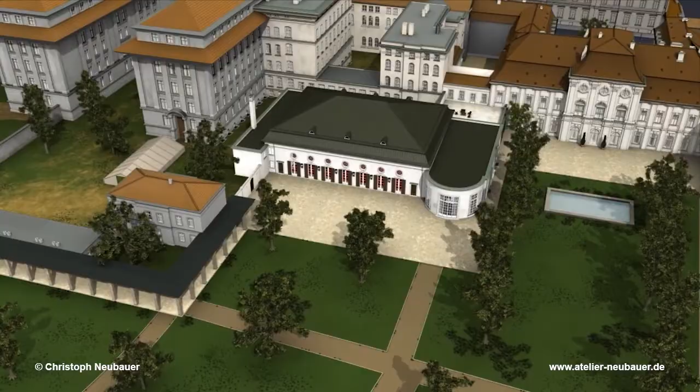In North Africa, the German army was retreating. In Russia, the Sixth Army was surrounded at Stalingrad, and the Luftwaffe had lost air supremacy over Germany. With this air raid, the theater of war had finally reached Berlin. Just one day after the attacks, Joseph Goebbels declared total war in a speech at the Sportpalast. Although Hitler had rarely been in Berlin since the start of the war, he was now worried about his safety within the Reichschancellery.

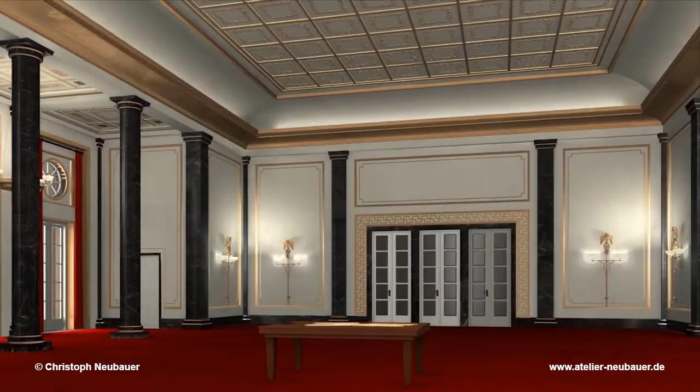On January the 18th, just one day after the air raids and on the day of Goebbels' declaration of total war, Hitler commissioned Albert Speer with the enlargement of the Reichschancellery bunker in Berlin and with the reinforcement of the bunkers of the new Reichschancellery. Speer was, however, not the architect in this case. The extension of the existing bunker had already been planned in 1942, so Albert Speer, as head of the Todt organization in charge of all major building projects, was only required in January 1943 to present the plans that had previously been drawn up by his head of office, Piepenburg.

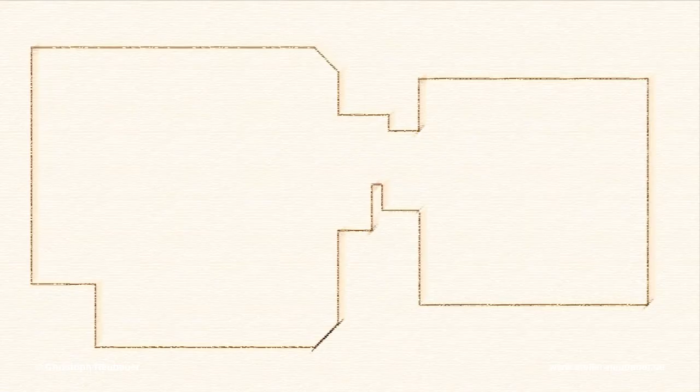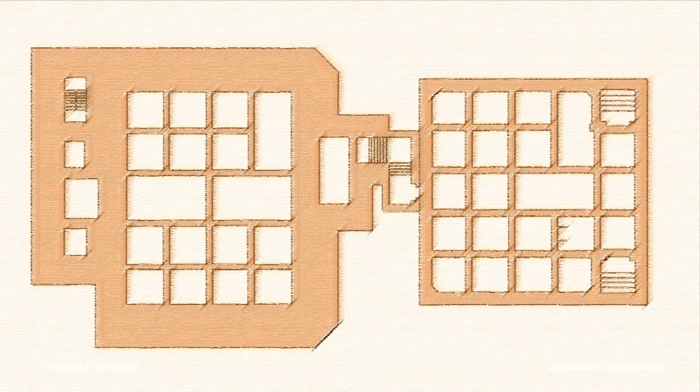The extension of the Reichschancellery bunker involved two separate building works. The first was the reinforcement of the existing bunker. The second was the construction of a new, deeper bunker, the so-called Tiefbunker. It was to be linked by a staircase to the existing Reichschancellery bunker. During a bombing attack, Hitler would have had to pass through the old Reichschancellery bunker on his way from his apartment into the new Tiefbunker. He therefore ordered the old bunker to be reinforced.

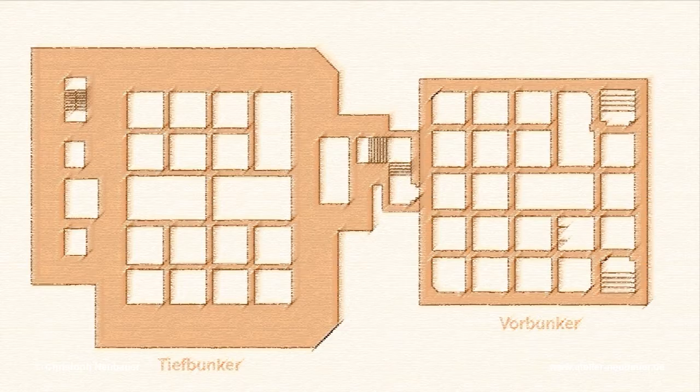Through the enlargement of the shelter, the old bunker of the Reichschancellery would become the Tiefbunker's vestibule and would therefore be called the Vorbunker. While the Vorbunker would continue to be used by the occupants of the old Reichschancellery, the Tiefbunker would be reserved for Adolf Hitler alone. He ordered the Tiefbunker to be laid out on a similar scale as the Vorbunker. But the floor of the new bunker should be 7 meters below the Earth's surface, that is 2 meters deeper than the base of the Vorbunker. This enabled the ceiling of the Tiefbunker to be as much as 4 meters thick.

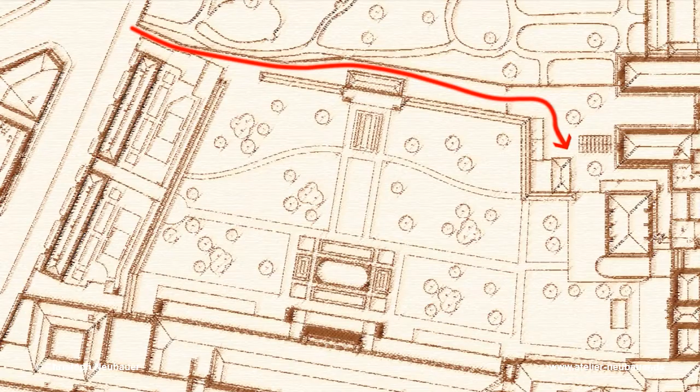The Tiefbunker would be built in the garden of the Reichschancellery, directly in front of the reception hall. A road leading from Hermann Göring Street through the garden of the Foreign Office would be used as a secondary access road to the construction site. For this, a breach in the new pergola near the reception hall was planned. One further access into the garden of the Reichschancellery already existed. The northwestern corner of the pergola had not been closed since the official opening of the new Reichschancellery.

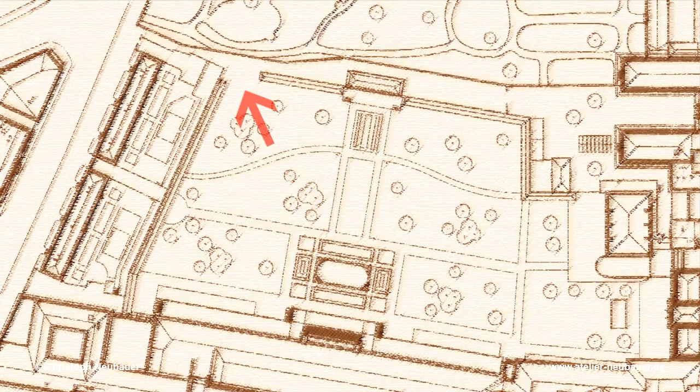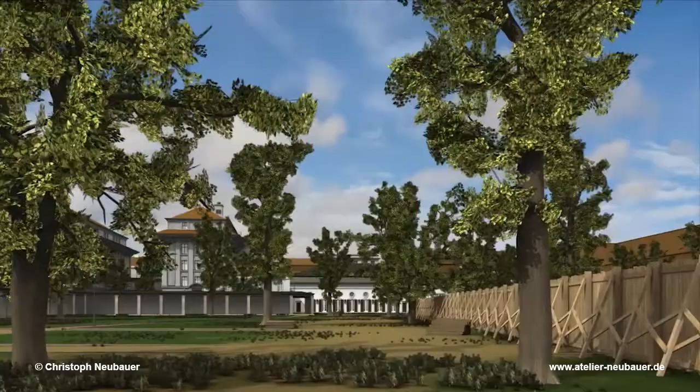During 1943, Hitler either stayed at his headquarters in eastern Prussia, which was known as the Wolf's Lair, or at the Berghof in Bavaria. As he only spent a few days in Berlin, it was not necessary to take him into consideration during the construction works. The once so well-maintained garden of the Reichschancellery was transformed into a huge building site. So as to protect at least Hitler's study from the attention of curious construction workers, a wooden screen was erected along the entire length of the Reichschancellery garden. The screen ran diagonally across the garden, parallel to the side access road, which had been made for the use of construction vehicles.

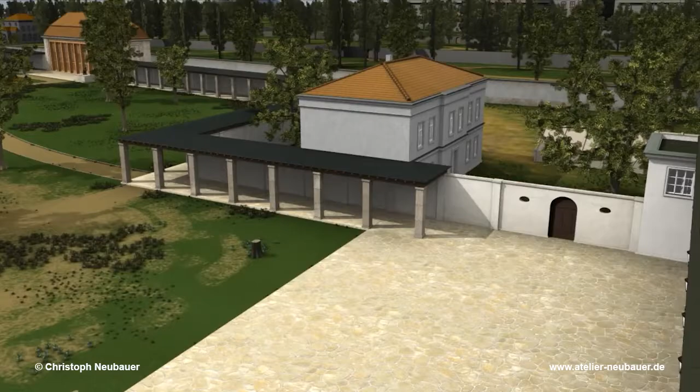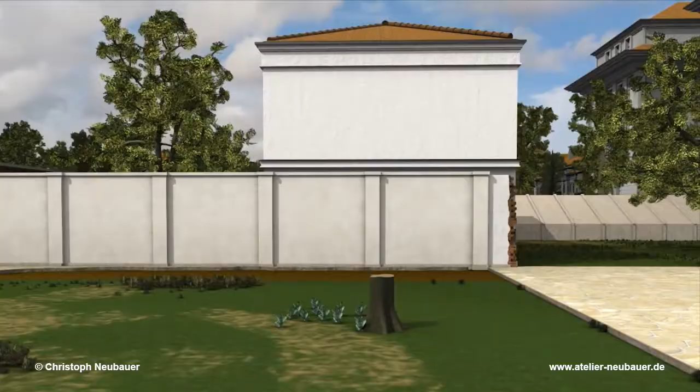In the summer of 1943, workers from the Hochtief Company began preparations for the construction of the Tiefbunker. To gain a secondary access to the building site and allow enough space for the machinery, the roof and some of the columns were removed from the east side of the pergola, and an opening was made in its back wall. Before the construction work could start, the stone paving slabs also had to be removed from the terrace.

Since the water table in Berlin lay at a depth of 3 meters and the base of the construction pit was to be at 10 meters, it was necessary to lower water levels in the region of the building site. Several well shafts were drilled close to the building site, from which water could be pumped via a system of pipes into the city's drains. From now on, the pumps worked day and night to keep the building site and later the bunker itself dry. To remove groundwater from the area of the bunker, a special pipe was laid at an angle through the garden of the Reichschancellery, ending in the drain at Hermann Göring Street.

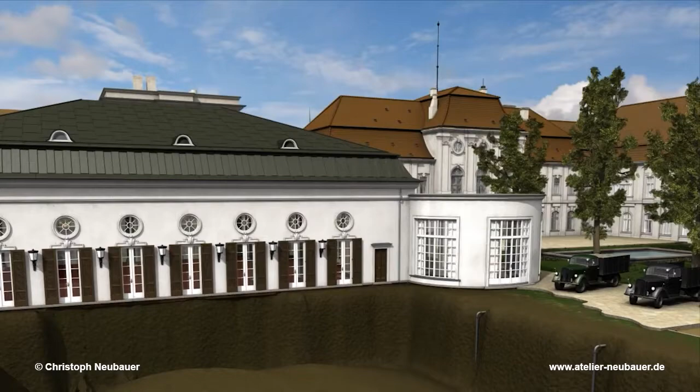After these initial preparational measures had been completed, the first 4 meters of the excavation pit could be dug out. In the next phase of work, a curtain of steel pilings was rammed deep into the ground. This ensured that the later 10-meter-high side walls of the excavation pit would not collapse in the course of building operations.

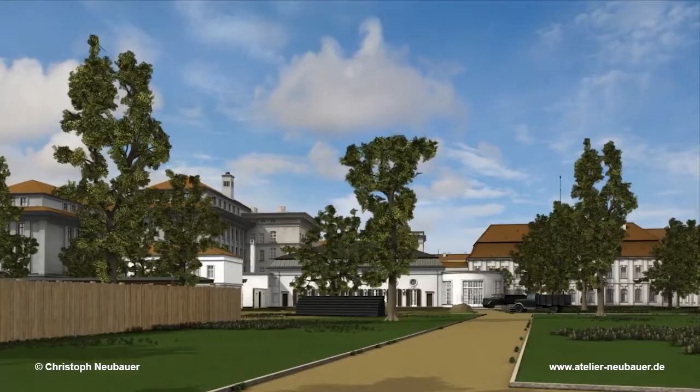As with the Vorbunker before, the Tiefbunker was built in an open excavation pit. This method of bunker construction was unusual during the war, as Allied planes entered German airspace on a daily basis. They would have been able to observe the building activities and to take photographs. There must have been great confidence in the strength of the bunker, as the site would have been known to the enemy even before construction began. Concentrated attacks on the bunker were to be expected.

Once the steel pilings were rammed into the ground, the pit could be excavated to its final depth. The pit was an estimated 10 meters deep and 40 by 40 meters wide. The pit provided enough space for the Tiefbunker itself, the guard rooms, an airlock, and an integrated stairwell.

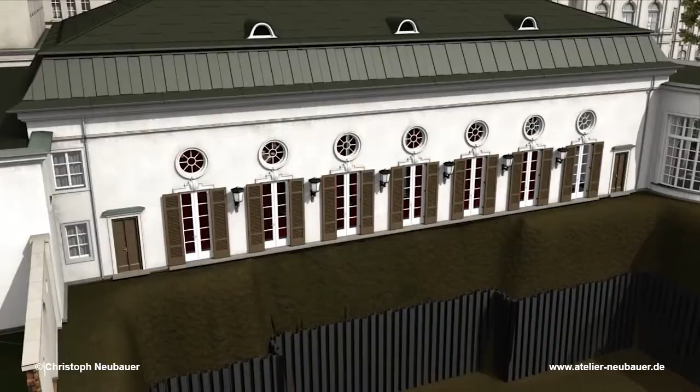The Tiefbunker was erected at least 3 meters away from the reception hall to prevent it from sliding into the construction pit and to ensure its stability. In this way, the Vorbunker could remain fully operational at all times during the construction of the Tiefbunker.

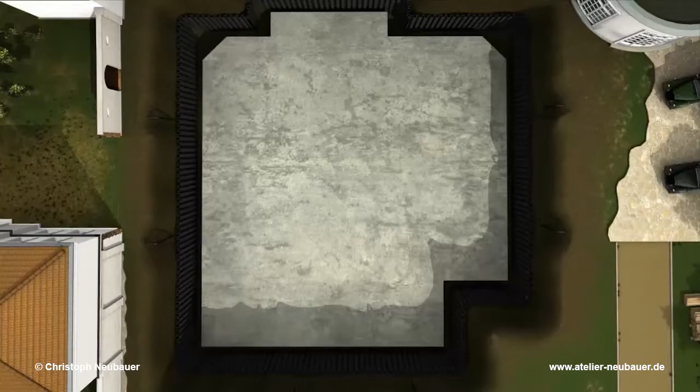The Tiefbunker and its entrances dictated the size of the base plate, which was cast at a thickness of approximately 2.5 meters into the base of the excavation pit. This provided the foundation on which the entire superstructure was to be erected. The foundation of the bunker measured 28 meters in the north-south direction and approximately 30 meters in the east-west direction.

The external walls of the Tiefbunker were made of 3.5 to 4 meters thick reinforced concrete, according to Hitler's exact specifications. To make the walls, a mesh of steel bars was first erected and then shuttered using wooden boards in the conventional way. Concrete would then be poured into the resulting form at a later stage.

Special openings for doors or supply shafts had to be worked into this wooden construction before the form could be filled with concrete. There are indications that such a shaft was integrated into the wall at the eastern side of the machine room. It probably allowed ventilation pipes from the air raid ventilation system to pass through into the bunker.

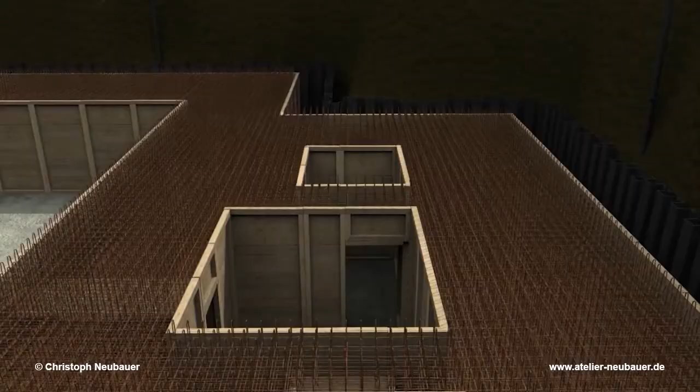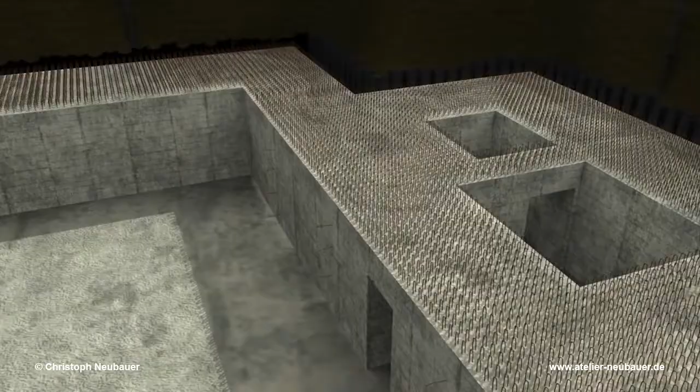When the wooden shuttering was complete, the pouring of the outer walls could begin. The liquid concrete was poured into the steel network covered by the wooden panels. This combination of steel and concrete gave the resulting reinforced concrete its special strength. The internal space of the Tiefbunker measured 20 meters from north to south and 15.6 meters from east to west.

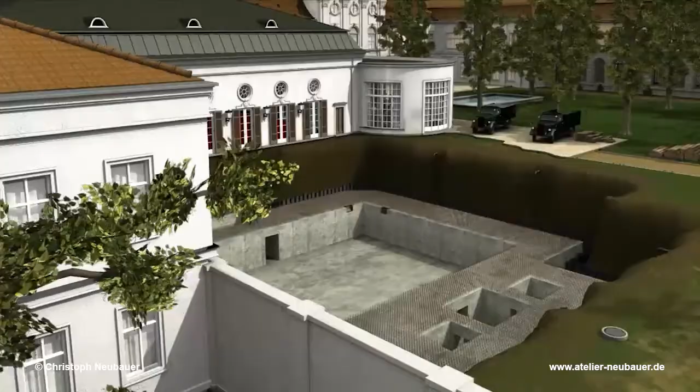It seems that Hitler was satisfied with the layout of the Vorbunker, as he wanted the Tiefbunker to be an almost one-to-one replica of it. The inner walls of the Tiefbunker all collapsed in 1947 during an attempt to demolish the Führerbunker. For this reason, there were no details of the Tiefbunker's internal layout in the survey carried out by the East German Secret Service in 1973.

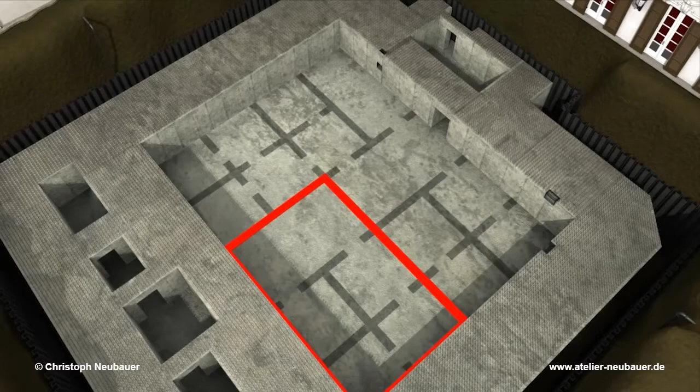The rooms in the bunker used by Hitler himself were, however, photographed between 1945 and 1947, allowing us to make a fair reconstruction of the southwestern area of the Tiefbunker. But exact measurements are only known for Hitler's office, which was 3.37 by 3.17 meters. The size and the functions of the other rooms can be approximated through eyewitness reports.

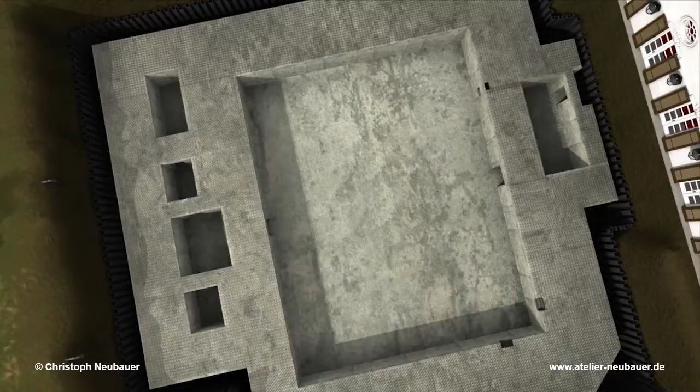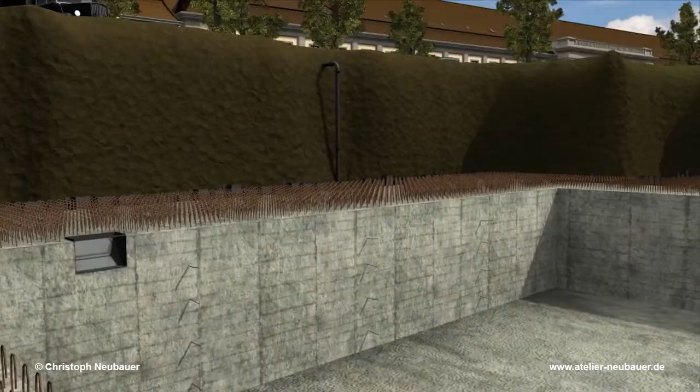The dividing walls, which created the different rooms, were cast with a thickness of 50 centimeters. These walls were cast within the bunker shell once the outer walls were completed. They were only connected to the outer walls by means of 3 or 4 steel bars bent out from the steel matrix of the outer walls before the concrete was poured in.

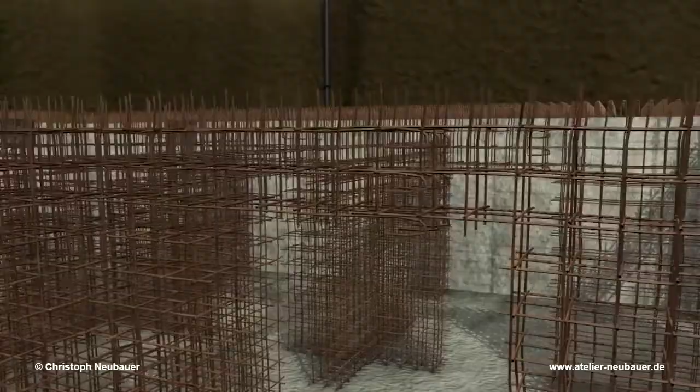The inner walls, therefore, stood as a kind of free-standing grid, more or less independent from the outer walls of the bunker. In this way, it was ensured that, should the outer walls shift under a direct hit, they would not take the inner walls with them. The inner walls were essential to prevent the ceiling of steel girders from collapsing, which will be described later.

Although the interior fittings were installed sometime after the completion of the framework of the Tiefbunker, it makes sense to describe the use of the rooms at this point. As in the Vorbunker, the room in the Tiefbunker for the emergency generator and the air filters for the ventilation system was located at the northwestern corner of the bunker. Opposite this room was the washroom with the toilets. Adjoining the washroom was a room containing electrics and pumps for wastewater extraction and for the internal freshwater well.

The layout of the Tiefbunker was almost an exact copy of the Vorbunker. However, comparing the arrangement of the doors between the two bunkers, it becomes clear that the Tiefbunker was not just a simple copy, but had been especially designed for Hitler's use.

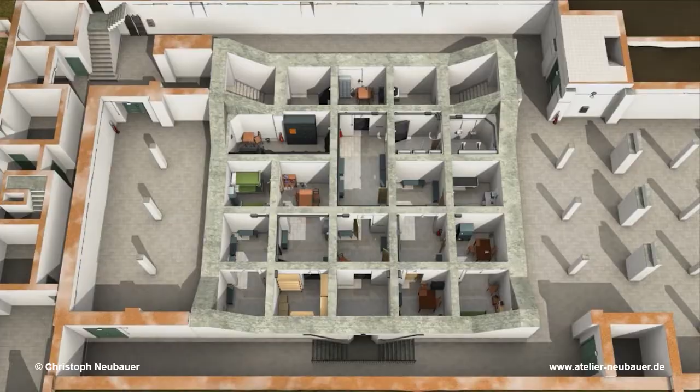The Vorbunker was designed to shelter up to 250 people. The doorways were arranged to allow people looking for shelter to disperse quickly into all the rooms. 8 of the rooms did not even have doors, but pillars on each side to support the ceiling. In this way, 4 double rooms were created, which were well suited to sheltering a large number of people. 4 doors led from the passages into the northern and the southern rooms of the Vorbunker. This bunker did not contain any private chambers.

A comparison of the doorways of the Vorbunker and the Tiefbunker quickly reveals how different the two bunkers were, in spite of their almost identical spatial arrangements. The Tiefbunker, like the Vorbunker, had its entrance from the eastern side and was reached through a long vestibule. But from here, only 2 doors led to the live-in areas of the bunker. Through these doors, access could be gained to the southern and northern parts of the bunker. These were 2 quite separate entities. The northern part of the Tiefbunker contained rooms reserved for Hitler's adjutants. This northern part of the bunker was only accessible through the door in the vestibule.

The area reserved for Hitler's own use was located in the southern part of the bunker. This part consisted of a waiting room, a meeting room, and 5 private rooms. Hitler's private chambers had a direct access to the Chancellery garden via the waiting room and the garden exit. The private rooms could only be entered through the door from the waiting room. They consisted of a foyer, from which doors opened into his dressing room and into his study. Hitler's bathroom could be entered from both of these 2 rooms. From the study led a further door through to Hitler's bedroom.

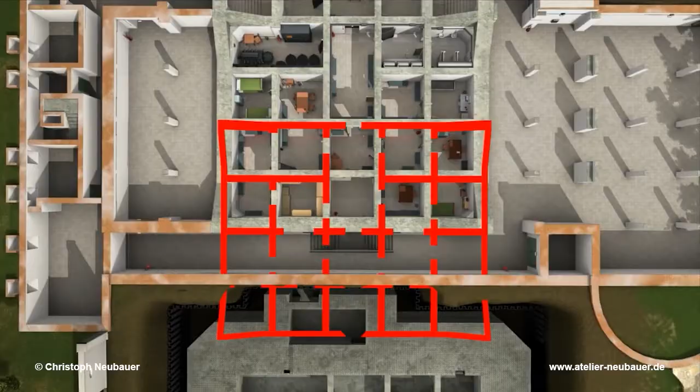The Tiefbunker, on the other hand, had only 1 entrance. This entrance led to a room from which 2 doors led to the 2 living areas of the bunker. The 5 living rooms, which were not part of Hitler's private area, could only be entered through 1 door in the vestibule. Hitler's own area, which occupied a little over a third of the Tiefbunker, could also only be entered through 1 door. That sufficed, as this area of the bunker was reserved for him with just the occasional function in the meeting room.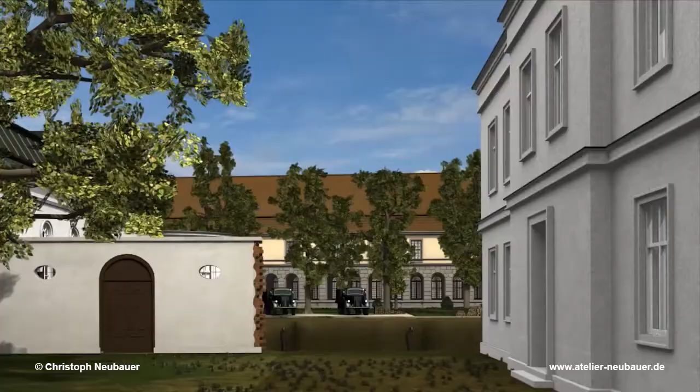When the plans for the construction of the Tiefbunker were submitted to Hitler, he accepted them with 1 alteration. He ordered the ceiling of the bunker to be reinforced with steel girders as a final layer of protection. This technique was known to him from the fortresses at the east and the west wall. If the ceiling were to be damaged, the girders would prevent sections of concrete from caving in.

Hitler only requested the girders, however, in his final approval of the construction plans. As the building preparations were already at an advanced stage, the installment of the girders meant a reduction in headroom. The planned height of the rooms was probably 3.08 meters, as in the Vorbunker. With a deduction of 3 centimeters for the floor tiles and about 20 centimeters for the steel girders, the height of the rooms would now only be 2.85 meters.

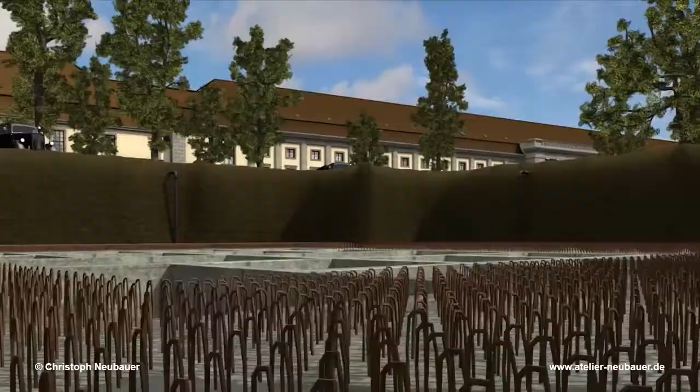The exact arrangement of the steel girders can no longer be ascertained. However, it is certain that each of the girders, resting on outer and inner walls, spanned 1 or 2 rooms.

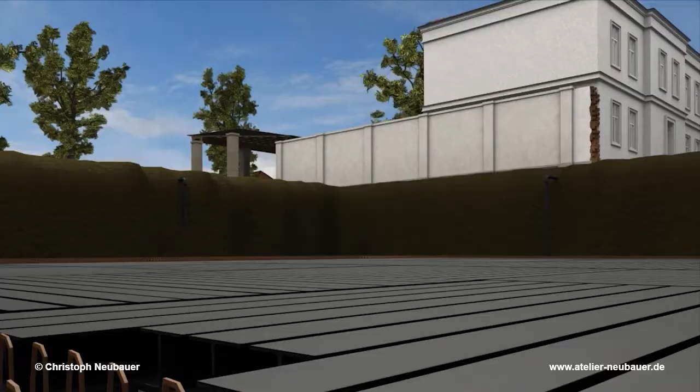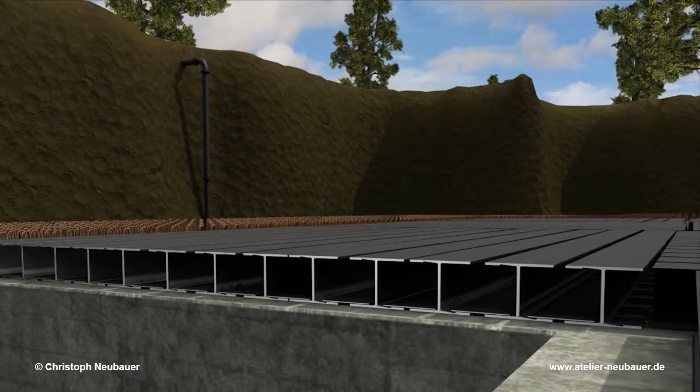The beams themselves were in the shape of a double T steel girder. Their height was 20 centimeters and their width was 24 centimeters. Each girder was laid out at a distance of 4 centimeters to the next one. Steel plates, approximately 16 centimeters wide and 0.5 centimeters thick, were inserted into the empty spaces between one girder and the next. In this way, a closed steel girder ceiling was created for the rooms, which extended a further 25 centimeters into the outer walls.

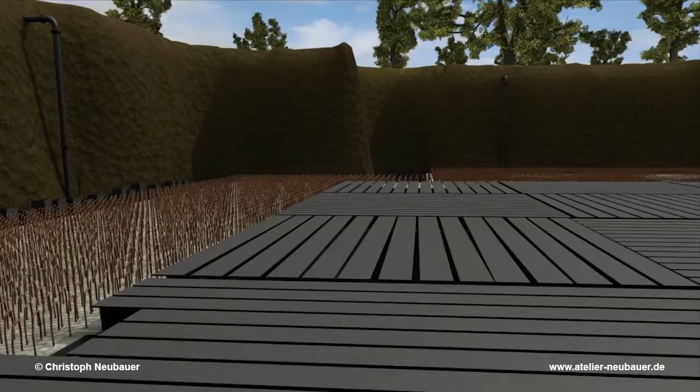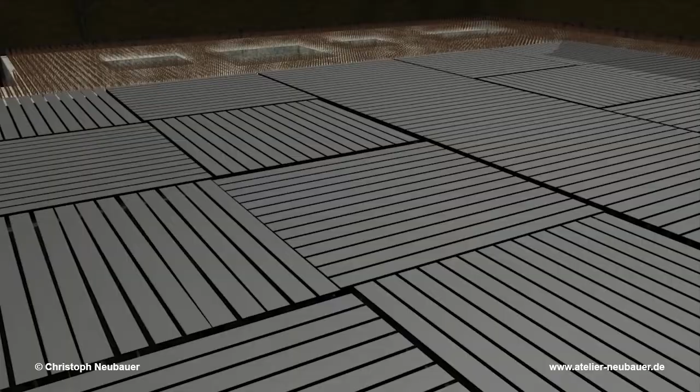The combination of steel beams and steel plates created an extra strong roof construction. The key to its robustness lay in its flexibility. The steel sheets, which were inserted between the beams, only possessed a thickness of 0.5 centimeters, which meant that they could relatively easily be deformed. If a strong point force was applied, these steel plates would distort, and much of the energy of the explosion could be dispersed. The steel girders themselves could also deform. The beams at the center of impact were forced apart, thus diffusing much of the force of impact before it reached the inner part of the bunker.

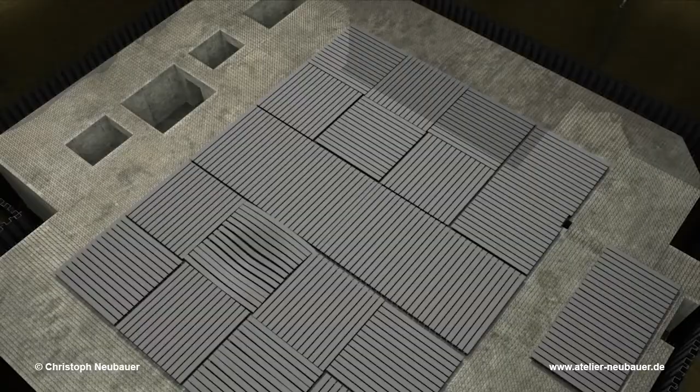However, to limit the extent of this deformation, the beams were placed in batches, aligned at 90 degrees to one another. If hit, the batch of girders sharing the same alignment would distort together. The deformation of one batch of girders would be limited by the surrounding batches lying at 90 degrees to it.

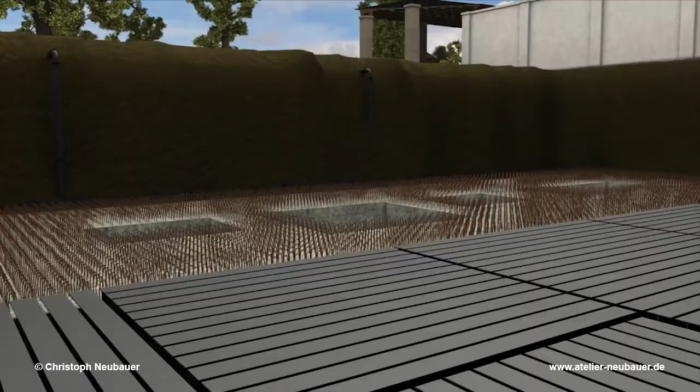Due to a lack of documentation, a reconstruction of the area around the garden exit becomes extremely difficult. The measurements of the Stasi prove that there was an exit through the western external wall of the bunker. This led to a guard room, which was 3 meters 30 wide and 3 meters 80 long. This room was connected through 1 meter thick walls with one room to the north and one room to the south, each measuring 2.2 meters wide. The lengths of these two rooms are not known, but their appearance and function were described in eyewitness accounts documented after the war.

According to these reports, the northern room was used as an airlock. This room was also connected to a staircase with a width of 2.15 meters and a length of approximately 4 meters. The room south of the guards room led to an emergency exit. This is probably also where the air inlet of the main ventilation system ended, through which fresh air was supplied to the bunker under normal conditions.

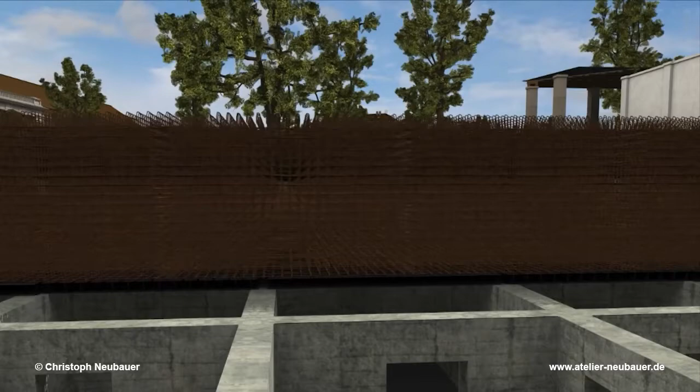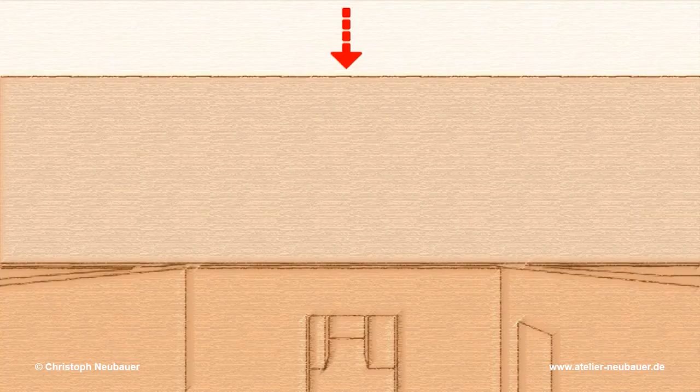Both the 3.5 meter thick reinforced ceiling of the Tiefbunker and the outer walls were made out of so-called heavy concrete. This concrete contained an especially high percentage of stone aggregate material. The ceiling of the bunker was also reinforced with steel. The function of the reinforcement should be briefly described at this point. If a bomb scored a direct hit on the bunker roof, the force of the impact and the explosion on the upper side of the roof would have caused a so-called blast funnel. The shock of the detonation would have dispersed from the point of impact in the form of a half-sphere.

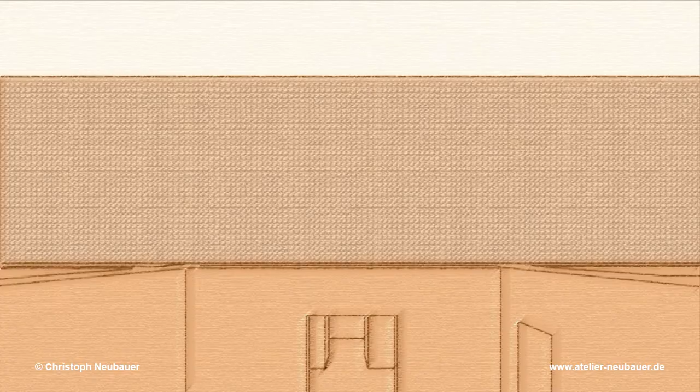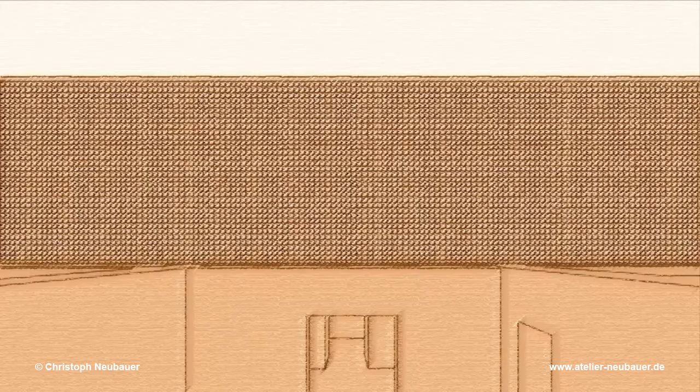If the ceiling had been made out of pure concrete, the shock waves would have blasted off some of the material on the underside of the ceiling. A so-called detonation lens would have resulted, and the occupants of the bunker would have been more likely to have been injured or killed by falling concrete fragments. In order to avoid this, standard practice in bunker construction was to add steel reinforcement rods to the concrete. For the construction of the Tiefbunker, a so-called cubic reinforcement was employed. Here, the steel rods, each with a diameter of 10 to 12 millimeters, were evenly arranged in all three axes at an interval of 10 to 15 centimeters. Concrete was then poured into the resulting matrix.

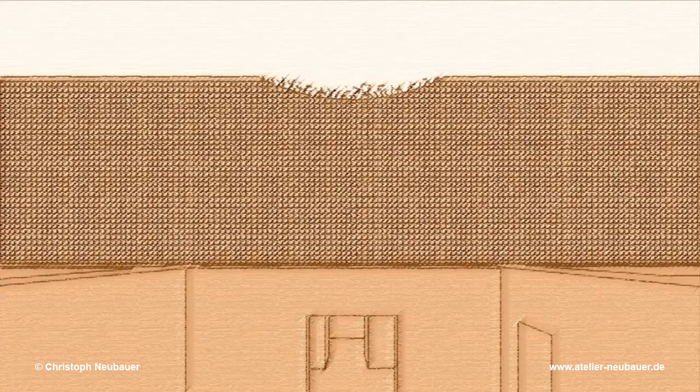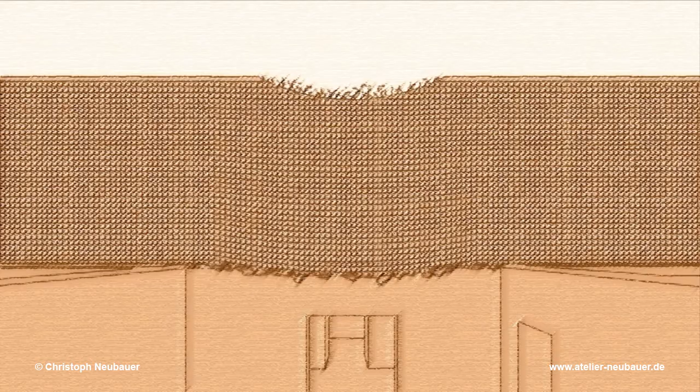If the roof had been hit by a bomb, it would still have caused an explosion funnel on the upper side of the ceiling, but the effects of the explosion would have been drastically reduced. The force of impact and of the explosion would have been channeled into the distortion of the steel bars. A swelling would have resulted on the underside of the ceiling, but the steel reinforcement would have prevented the concrete from falling down. Because the Tiefbunker had an additional ceiling made of flexible steel girders, no concrete fragments could be loosened by the blast into the rooms below.

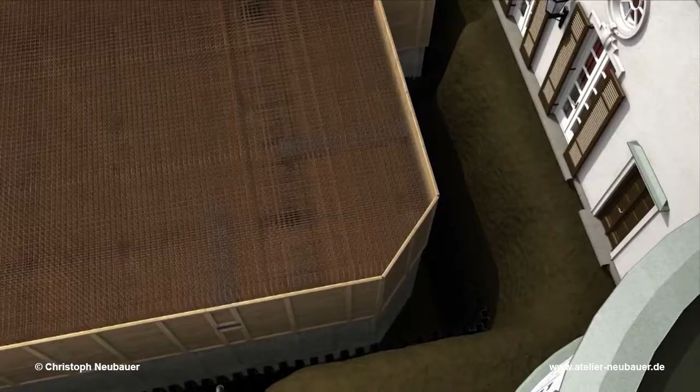Since two supply shafts needed to pass through the ceiling of the southeastern room of the Tiefbunker and up to the surface, here two special forms had also to be prepared before the concrete could be poured in. It is known that the shafts were lined with metal plates. It may also be presumed that the metal plates on the walls of the shafts were put in place before the concrete was cast. The position of the entrance to the southern shaft was, according to documentation, 1.5 meters lower than the top of the bunker roof.

The position of the entrance to the eastern shaft is yet unknown. The purpose of the shafts is also unclear. It could be that the eastern shaft contained the electricity supply. The size and the position of the southern shaft allow us to conclude that it was used to transport wastewater to the surface. The exit shaft for the air raid ventilation system was at the northeastern corner of the bunker, running vertically through the bunker ceiling.

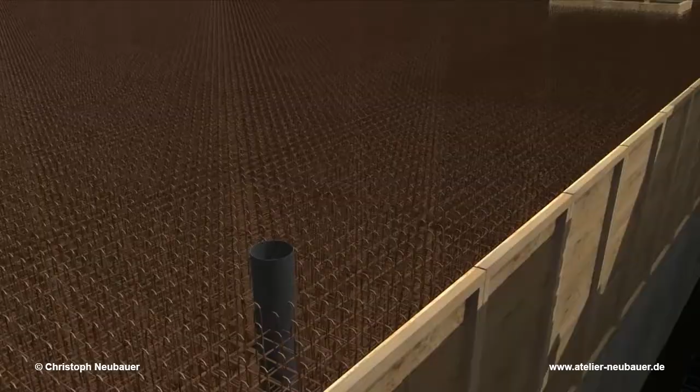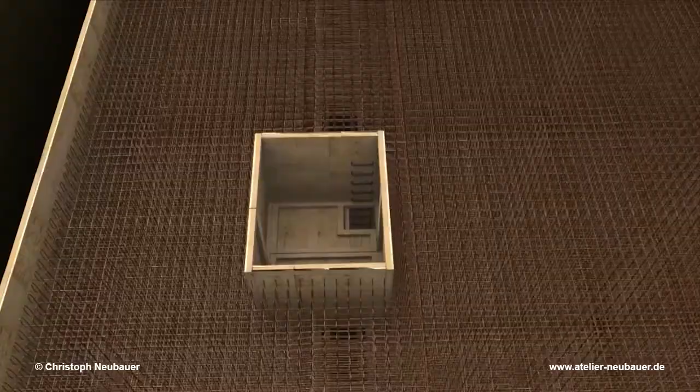The passage for the garden exit was also created on the western side of the bunker. The walls of this opening consisted of a rectangular shaft extending through the ceiling of the western outer bunker wall down to the floor of the bunker. Above the entry room to the emergency exit, a rectangular shaft was also created in which iron steps were fixed. This emergency exit led to the filter room under the garden and was intended to give the bunker's inhabitants another way to escape to the surface in case the two main entrances were blocked by debris.

In order to achieve optimal strength from the concrete, the ceiling, like the outer walls before it, had to be cast in one piece. This required an enormous amount of organization. Liquid concrete had to be continually available until the forms had been filled. The combination of the tight steel network and the heavy concrete proved to be a huge technical challenge. With its high stone aggregate content, it was difficult to pour the concrete through the 3.5-meter high network without leaving any hollow spaces. The concrete needed more water than would normally be used to make it flow through the mesh evenly. This high water content, however, meant that the concrete took longer than normal to set. The shell was complete once the ceiling of the bunker had been cast.

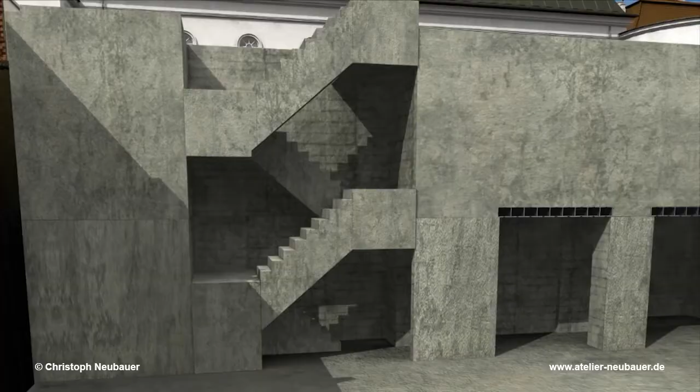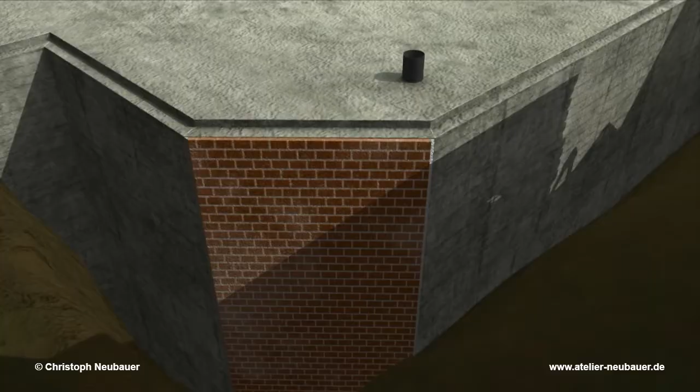A section through the western supply zone of the Tiefbunker shows the arrangement of the stairs. 37 steps led from the Tiefbunker into the garden of the Reichschancellery. The steps were 1 meter wide and 19 centimeters high. One flight consisted of 9 steps. The staircase had 4 turns, and the size of the 2 flights was identical. The final task was to clad the 2 outside sloping walls on the east of the building with red bricks. This diffusion layer offered additional protection from direct lateral hits. The outer walls were then coated with tar to protect the bunker against moisture.

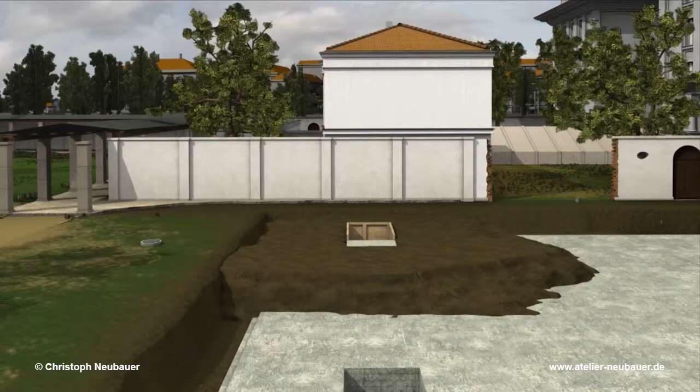The overground part of the Tiefbunker could now be finished. To begin with, only the space between the bunker's roof and the ground level in the area of the garden exit was filled with a 50-centimeter layer of soil. The rest of the bunker ceiling was also to be covered with soil once the concrete had hardened. The exit area in the garden was created on top of the deposited soil. The staircase was to end in a concrete block, which, with its 3-meter thick walls, would provide maximum protection for the exit.

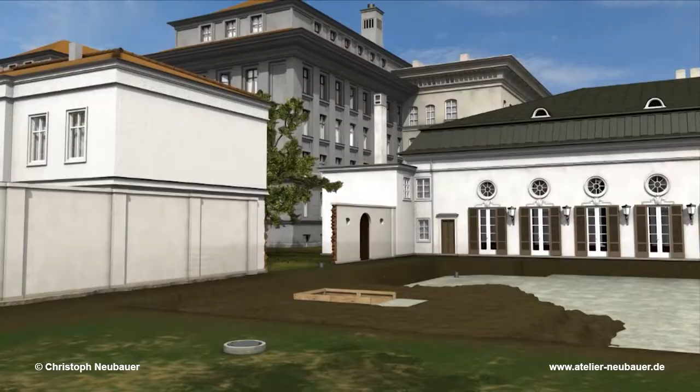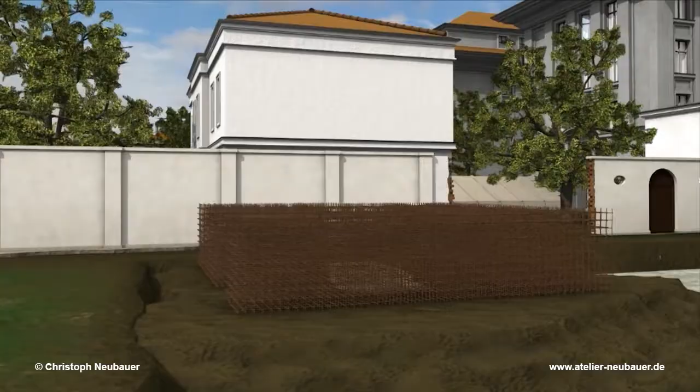In contrast to the construction of the bunker, no concrete foundation was made for the protective tower of the garden exit. The exit tower constituted an independent part of the bunker, which was neither connected to the staircase shaft nor to the bunker itself. A separate steel mesh was therefore constructed for it. Here, however, the steel mesh stood on the soil, unconnected to the bunker or to the staircase. Therefore, the layer of earth between the garden exit and the bunker ceiling served as a buffer between the Tiefbunker and the garden exit tower. If the garden tower were to be impacted by a bomb, the shock wave would be dispersed by the soil and the force of impact on the Tiefbunker itself would be considerably reduced.

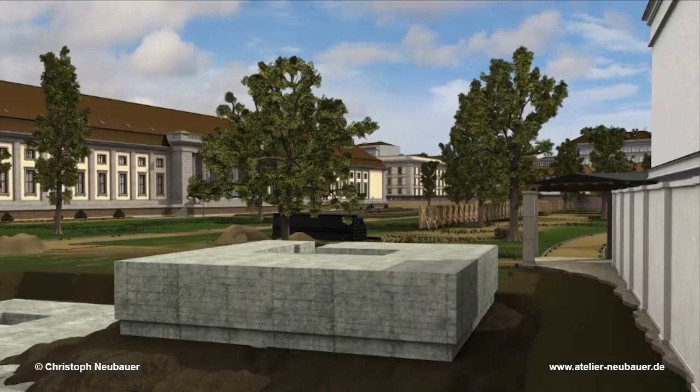Yet another wooden form was erected to allow concrete to be poured into the steel mesh construction for the protective tower of the garden exit. In contrast to the walls of the bunker, the walls and the ceiling of the garden exit tower were individually cast in several separate layers. The effort to cast it in one piece would have been disproportionate to the minor function of this part of

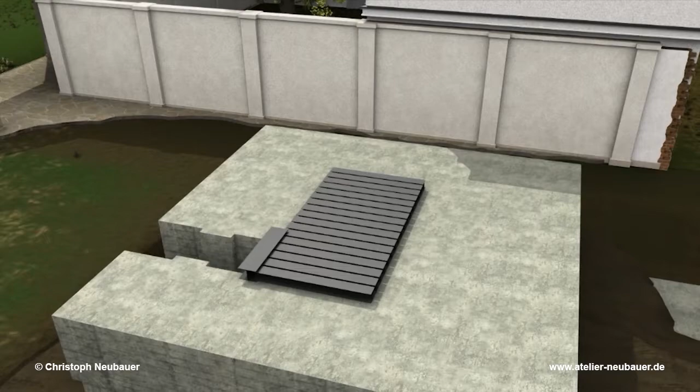the bunker. The garden exit tower was given a layer of steel girders to lend additional strength to the ceiling. An especially large girder was installed over the inner door. This would offer additional protection for the door frame, as well as providing a support base for other girders. These were laid in east-west direction on the outer walls of the exit tower of the garden exit. The tower of the garden exit was then given a 3-meter thick concrete roof.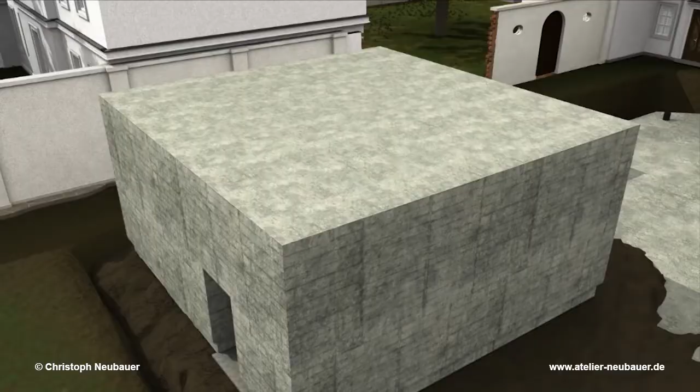There is no reliable information about the appearance and the workings of the ventilation inlet and outlet shafts ending above the level of the bunker roof. Since these shafts were built over at the beginning of 1945, eyewitness reports are the only reliable source of information for the reconstruction. The eyewitnesses relate that after the completion of the bunker, the air shafts ended at the level of the bunker ceiling. A metal grill then secured the opening of each shaft.

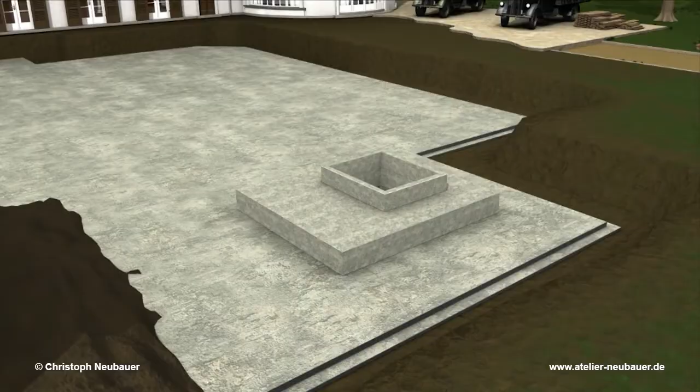The air inlet for the main ventilation system was to be found above the southwestern corner of the Tiefbunker. The shaft for the emergency exit ended here in a room also containing the air filters. The northern part of the room was most likely to have been secured with a concrete ceiling in order to protect the shaft from penetrating bombs. In the southern part of the ceiling of the filter room could be found the opening with a metal grill.

In the Tiefbunker, a combined ventilation system built by Drägerwerk Lübeck was installed, in which the main ventilation worked on a flow principle. The outflowing air passed through the staircase to the surface. It is most likely that the outflowing air was expelled through the shaft located underneath the exit room. The ventilation outlet was situated next to the stairwell in a small shaft, 50 centimeters wide, 1 meter long, and 50 centimeters high.

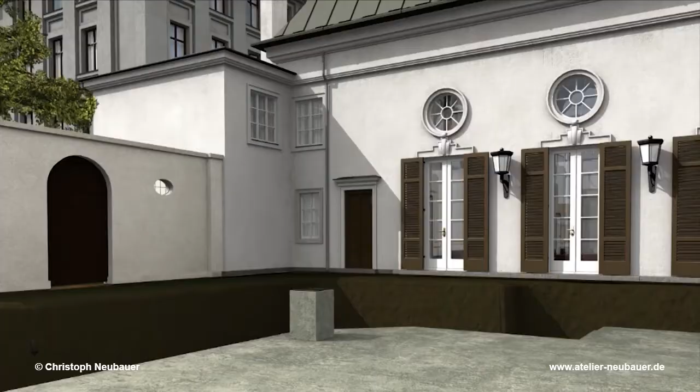In the northeastern area of the Tiefbunker, at garden level, there were also ventilation shafts. The shaft described earlier, ending right in front of the reception hall, was the air outlet for the air raid ventilation system. The air inlet for the air raid ventilation system was close to the pergola wall, north of the Tiefbunker. The bunker would be supplied with fresh air via this shaft during an air raid alarm.

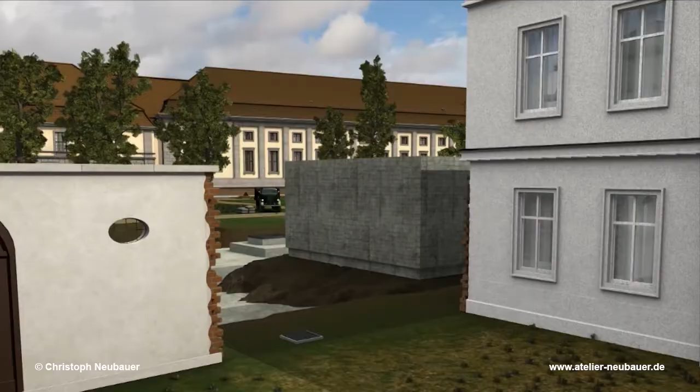In contrast to the main ventilation system, the filters for the air raid ventilation system were located in the engine room of the bunker. It was therefore possible to change them from inside the bunker even during a prolonged gas attack. The shell of the Tiefbunker had been completed by autumn 1943. However, as the Tiefbunker was to be connected with the Vorbunker, which was to become part of the greater bunker complex, the Vorbunker had to be reinforced.

In 1943, new high-caliber bombs could have penetrated the 1.6-meter ceiling of the Vorbunker. The reinforcement of its ceiling was therefore the most important safety measure for the Vorbunker. Under the dance floor of the reception hall was a 50 centimeter thick air cushion. Part of this air cushion was now to be sacrificed for the strengthening of the bunker ceiling. In this way, the reinforcement of the Vorbunker could be carried out without having to sacrifice the reception hall.

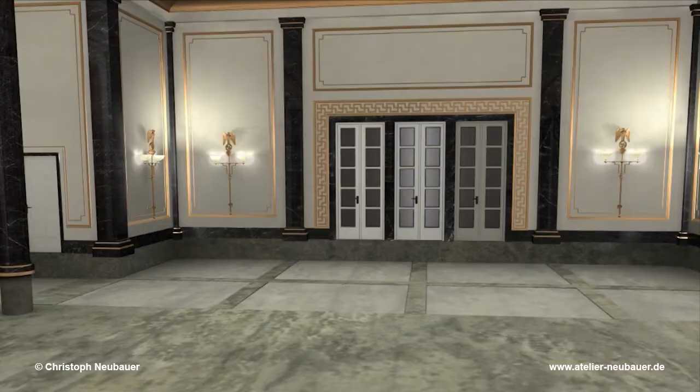The air cushion above the bunker ceiling, in the zone between the bunker and the winter garden, was filled with a double layer of iron girders and a layer of unreinforced concrete. Studies have until now failed to explain how this was carried out. The eastern row of columns in the reception hall stood on the roof of the bunker directly above the internal division walls. The simplest method would have been to let the columns remain where they were and to fill the air cushion around them with concrete.

However, an examination of the photographs of the bunker ceiling taken after the end of the war does not reveal any indication of remains of the column bases. Therefore, it must be assumed that the eastern columns were not still standing on the bunker roof while the roof was being reinforced. The construction of the reception hall would have permitted the removal of the columns, as its outer walls could have easily taken the weight of the roof.

The reinforcement of the bunker ceiling was therefore probably carried out as follows. First of all, the columns which were impeding the construction work were taken apart and removed from the building site. The dance floor was then removed, in addition to the 50-centimeter high column bases, which extended through the air cushion to the ceiling of the bunker.

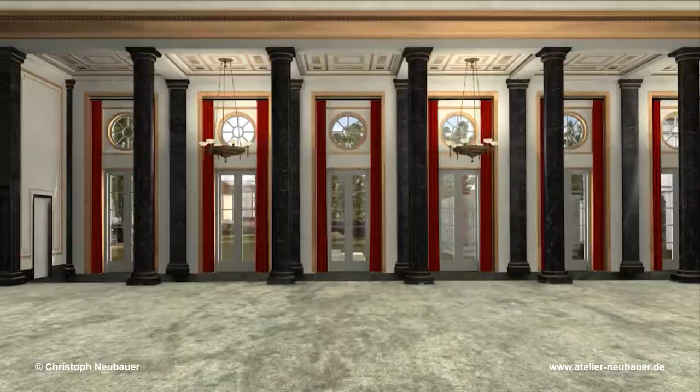After the concrete had hardened, the columns were returned to their original locations. Now they were standing without their bases directly on the ceiling of the Vorbunker. After completing this work, a new 60-centimeter strong protecting layer of steel beams and concrete was laid on the ceiling of the Vorbunker. By this addition, with an overall strength of 2 meters 20, there was a greatly improved protection against bombs. The reinforcements of the Vorbunker were now complete.

The concrete of the Tiefbunker would still take several months to harden completely. As the Vorbunker had received a double layer of steel beams, it was until 1944 the safer of the 2 bunkers. But in order to make use of the Tiefbunker, it still had to be connected to the Vorbunker. To connect the Tiefbunker and the Vorbunker with each other, the western basement corridor of the reception hall, located adjacent to the Vorbunker, had to be integrated into the bunker's staircase. However, the whole western facade of the reception hall rested on a wall-like foundation through which the new opening to the new underground corridor had to be inserted.

If the reception hall was to remain intact, this section of the facade had to be artificially supported during the excavation of the passage. First, a breach was made in the western outer wall of the reception room. Concrete-coated steel beams were laid over the gap to support the wall of the reception room above.

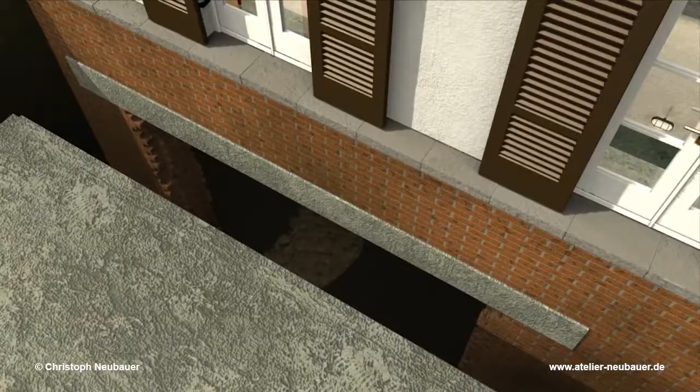The staircase was not nearly as strongly constructed as the Tiefbunker itself. There are indications that the outer walls of the staircase were constructed out of pure heavy concrete. It seems that for this minor area of the bunker, an extra reinforcement of the concrete was not considered necessary. The concrete walls of the staircase were also only 2 meters thick. 2 flights of stairs bridged the 2 meters difference in height between the Vorbunker and the Tiefbunker.

After leaving the Vorbunker, the stairs turned 90 degrees to the north. Five steps, each with a height of 17 centimeters and a depth of 28 centimeters, led down to an interim level. Here, the stairs turned again through 90 degrees and then led, after 7 more steps, in a westerly direction to the guards' room in the Tiefbunker. A layer of steel girders reinforced the ceiling of the staircase. These girders each had a width of 21 centimeters. The arrangement here was identical to the one previously described in the Tiefbunker.

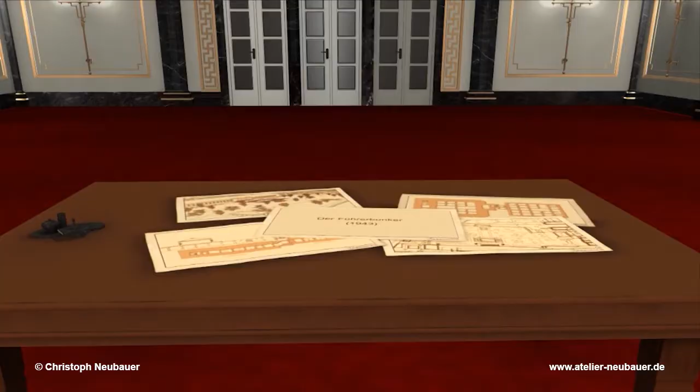After finishing the shell of the Tiefbunker, the construction team could start the implementation of the second part of the building plans, which had been ordered by Hitler in January, the reinforcement of the bunkers of the new Reichschancellery. But nobody at the time could have predicted how much more significant these construction works would become after the events of July 20th, 1944.